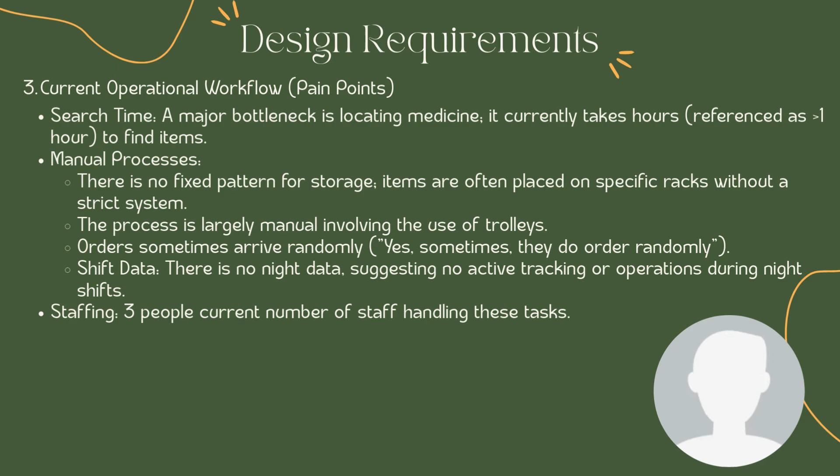The current workflow has a major bottleneck. Locating medicine takes over an hour. Storage is random and purely manual, relying on trolleys and just 3 staff members. There is also a complete lack of data tracking for night shifts.

Therefore, we need a flexible solution, not a standard off-the-shelf ASRS. Since tagging every unit with RFID isn't feasible, we will focus on consolidated carton scanning. We plan to use raw supply history to optimize our sorting logic, while remaining mindful of potential budget limitations.

Therefore, we need a flexible solution, not a standard off-the-shelf ASRS. Since tagging every unit with RFID isn't feasible, we will focus on consolidated carton scanning. We plan to use raw supply history to optimize our sorting logic, while remaining mindful of potential budget limitations.

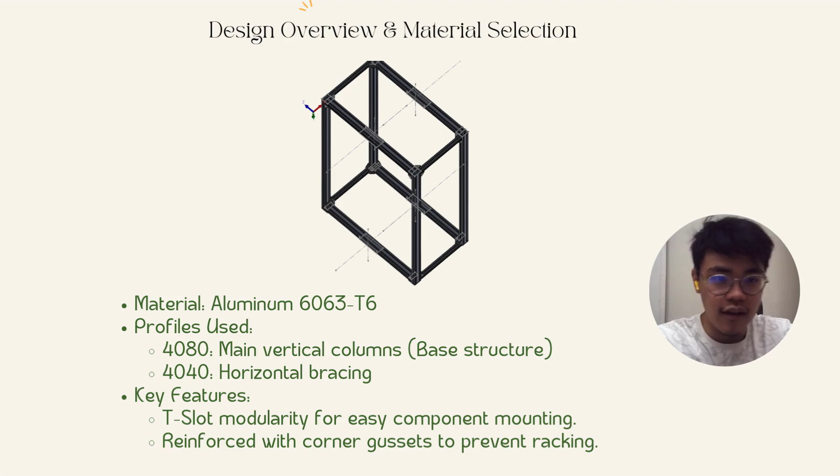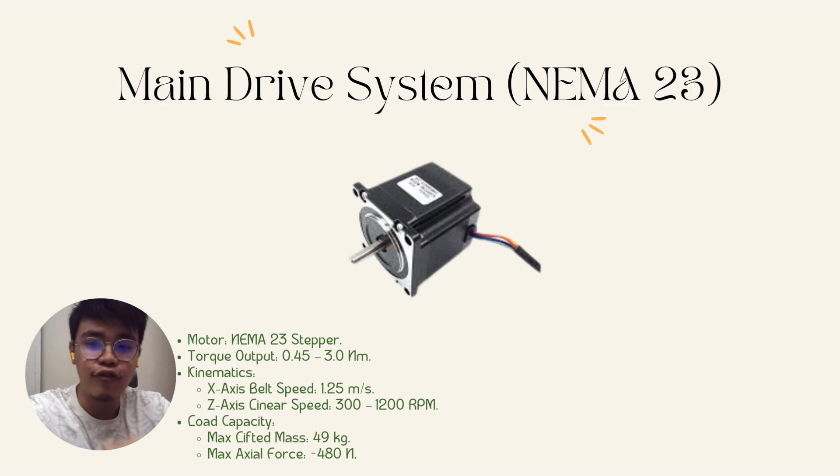So we use the NEMA 23 stepper motor for the X-axis and Z-axis mechanism. Why? Because its torque output ranges from 0.45 to 3 Newton meters, and we have calculated that the X-axis belt speed is going to be 1.25, which is sufficient, and the Z-axis is going to be 300 to 1,200 RPM, which is plentiful. You can see the calculations, max lifted mass, and the force as well, which is sufficient.

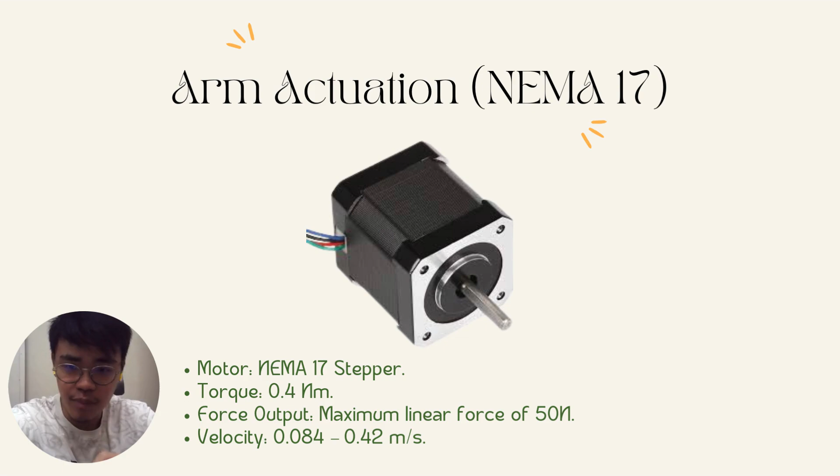Okay, we use the NEMA 17 for the Z-axis, which is the gripper arm, the suction. We use the 17 because we don't need much torque, just 0.4 and below. We have a linear force of 50 newtons, which is really plentiful. Here's the velocity, which ranges from 0.084 to 0.42, which suffices because the range of motion is quite small, so we do not need that much speed.

We decided to use a vacuum pump for our end effector system because the tote tray has a flat surface, and we do not need a complicated gripper mechanism, for which we'd need to calculate all the gripper strength. Here are the specs of the vacuum pump, a 12-volt DC vacuum pump, and we're going to have 2 of them to suck onto the tote tray. Here's the operating pressure, the lifting mechanics; all of the specs are over here.

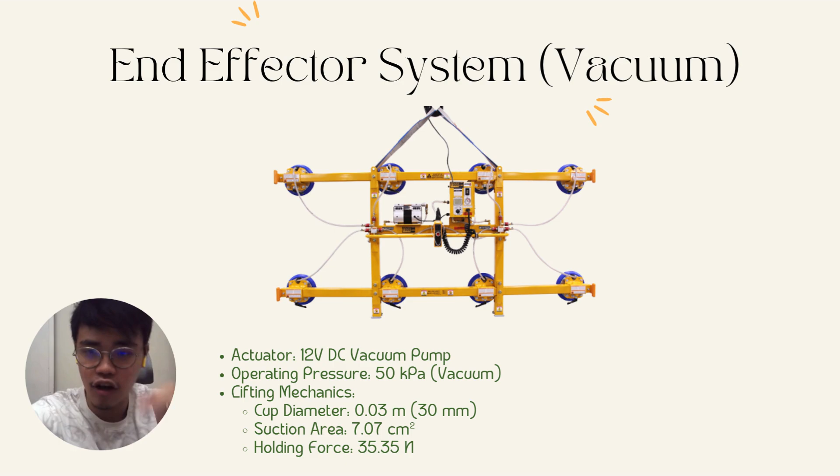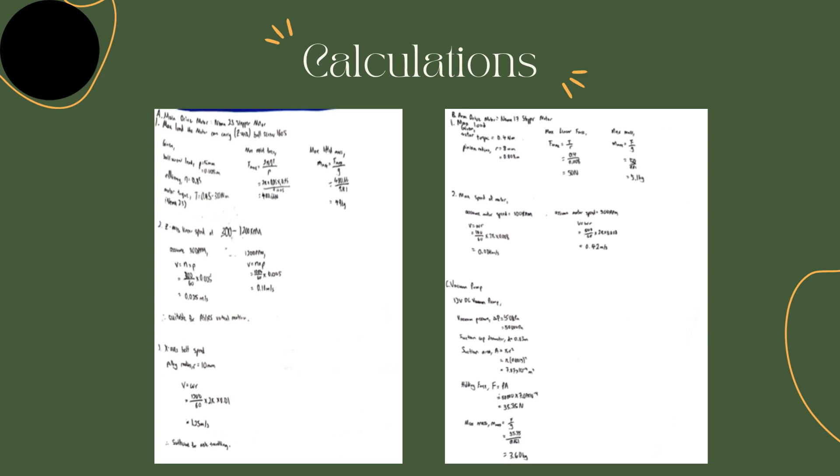These are the necessary calculations for the main drive motor, the NEMA 23 stepper motor: speed, mass that it can carry, and the X-axis belt speed. Also calculations for the arm drive, the NEMA 17 stepper motor: the motor force it can handle, the maximum speed, and whatnot. And also the vacuum pump: the suction force and max mass it would be able to pull.

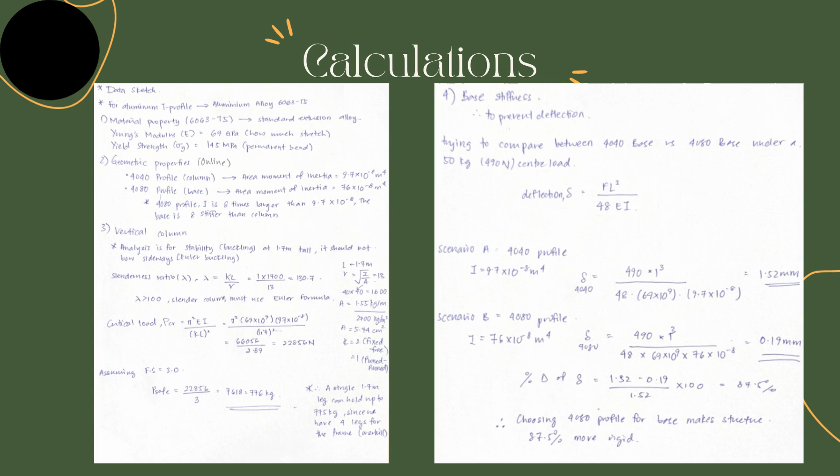From our calculation, we found that choosing the 4080 profile for the base makes the structure 87.5% more rigid. We also calculated the natural frequency analysis. This is based on our assumptions. We calculated that 345 RPM is where the frame will hit resonance and shake violently.

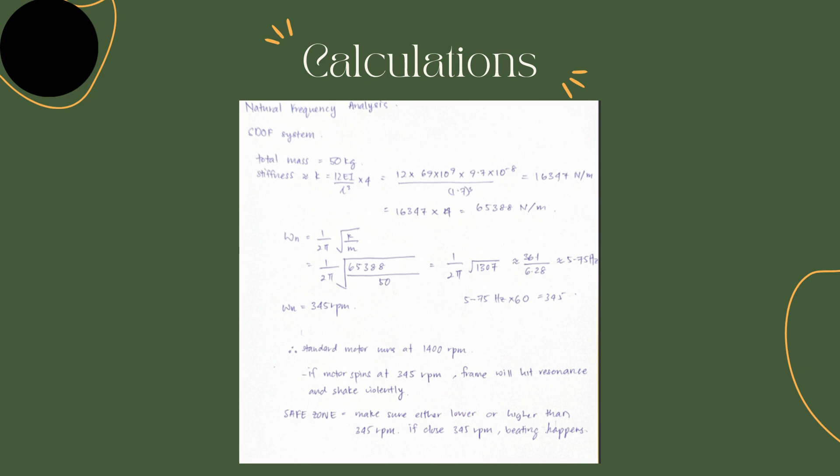So the safe thing we can do is make sure we are either lower or higher than 345 RPM so that beating can be avoided. This is the analysis we did using SolidWorks on the 40x80 base. As you can see, this is the study results to show how the deflection would be if more

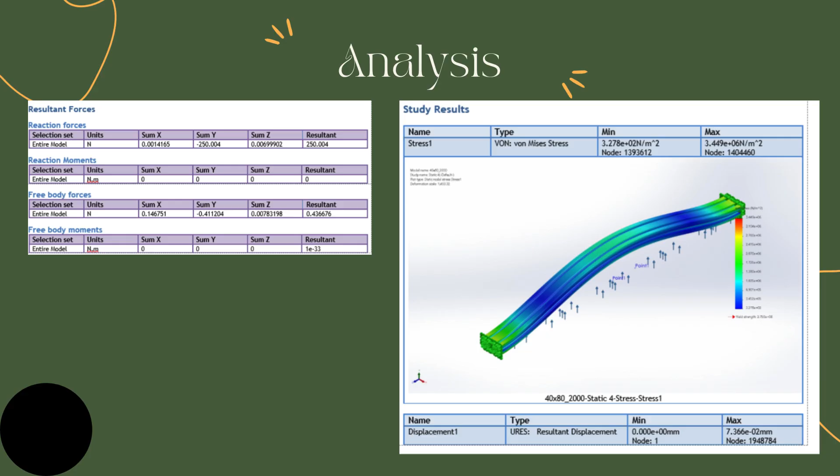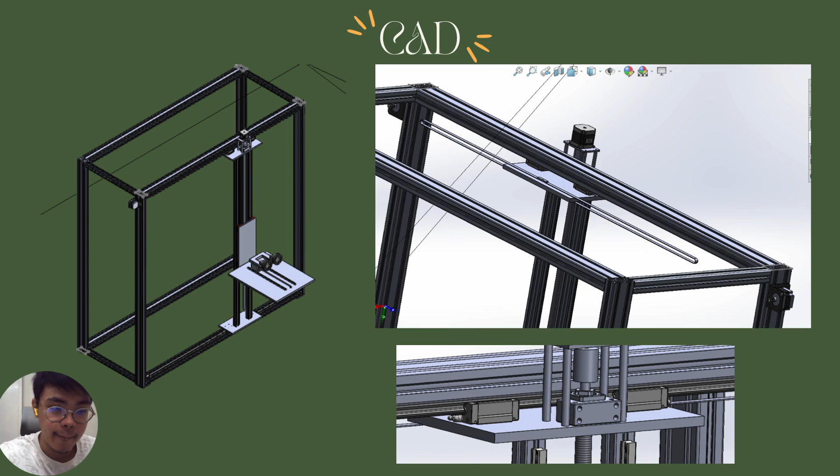And this carriage plate is sitting on top of linear carriage blocks and on top of a linear rail. And that's how we drive the x-axis mechanism. You can see a detailed view on the bottom, right? Alright, so we have our y-axis mechanism, which is the vertical lift. This vertical lift is driven by the NEMA 23 stepper motor, which sits on top of a housing with spacers so that we can access the coupling easier.

This coupling attaches the motor with the lead screw, the ball screw. And of course, we have our BK12, which is kind of like a bearing, so that it makes sure that this ball screw doesn't vibrate violently and expand due to thermal stress. So we have our vertical masts beside the ball screw.

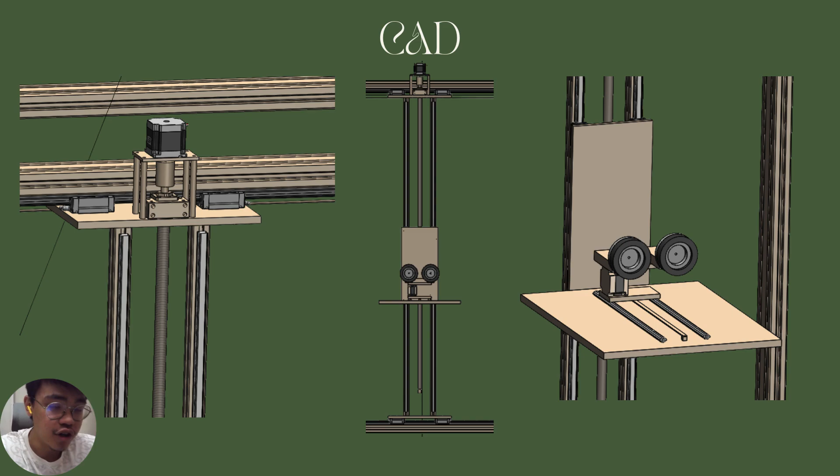and then this entire chassis, the aluminum arms and the suction, will be driven by a NEMA 17 stepper motor, and it sits on top of linear rails with linear blocks and a timing belt. The stepper motor will attach to the pulley, which will be attached to the belt. This belt is fixed, and it's some sort of zip line mechanism where we have this chassis moving along the rails like a zip line. Yeah, that concludes our explanation of the CAD drawing.

Our pharmacy smart sorting system is based on the ASRS system, where we use a matrix storage approach, FIFO logic, as well as real-time update. I will explain more about the matrix storage approach, where each medication slot is identified by specific row and column coordinates. When a storage or retrieval command is received, the control system processes the requests accordingly. For storage operations, medication data such as identification, batch number, and expiry date are scanned, and the available matrix position is assigned based on FIFO logic, ensuring newer stock is placed behind the older stock.

For retrieval operations, the system searches the matrix database to locate the oldest valid stock for the requested medication, calculates the optimal movement path, and retrieves the item. After each operation, the matrix inventory is updated in real time, where the stock levels are monitored, and alerts will be triggered if replenishment is required, ensuring efficient, accurate, and FIFO-compliant pharmacy operations.